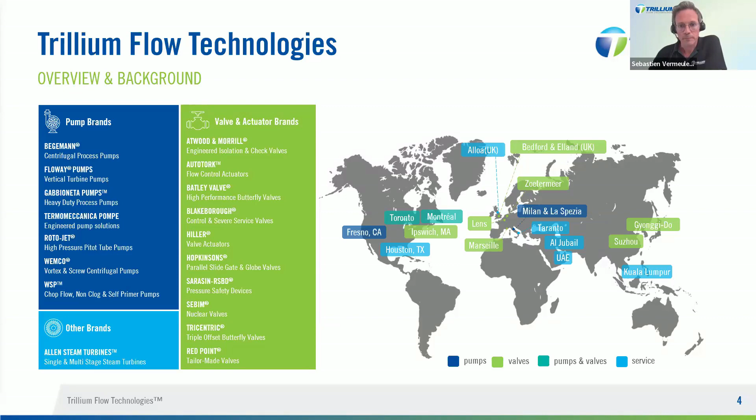So Trillium Flow Technologies' heritage of innovation spans 190 years. The corporation is not standing still, adding new products and services to make our customers' processes more efficient and productive. A recent example includes the previously mentioned Red Point valve product offering, joining the Trillium family in 2020, expanding our product and service provision for valves. And in 2022, we were joined by Termomeccanica Pompe, enhancing our expertise and offering in pumps for power, water, plus oil and gas, as well as enhancing the Trillium Flow service portfolio.

Just to have a core focus on the PRV solution, and also to demonstrate we have addressed the hydrogen market for decades: Sarasin got its first PO from Air Liquide, which proposed a unique solution for air separation units, ASU, and steam methane reforming in 1984. So it's a long partnership, and we already supply solutions for cryogenic or high pressure valves.

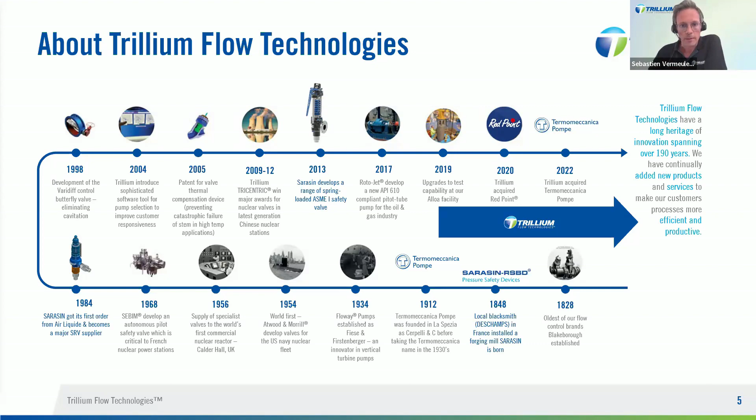So let's try to first understand the hydrogen challenge. I hand over to Simon for that. Yeah, so thanks, Sebastien. All right, so let's just break down a little bit the background of hydrogen. I'm sure some of you already know this, but it's probably worth just getting a good grounding around it.

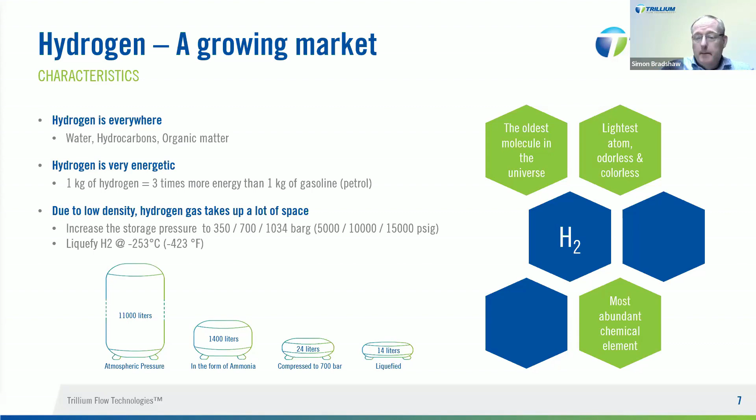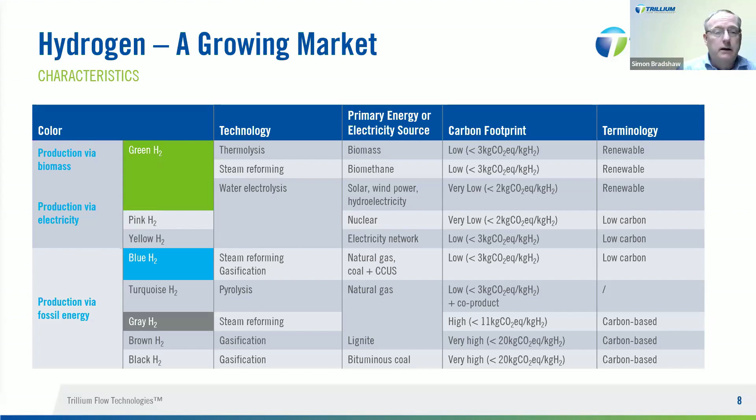Next slide. All right. The other thing you tend to see in the news is that hydrogen is going to be this massive Swiss Army knife that's going to do everything: transportation, this, that. The reality is that in the long run, and the long run market is not necessarily what we're in right now, certain applications are more likely to win out for hydrogen, and some are not, just because of the economics and the technical details. So there's a couple of ways to look at this.

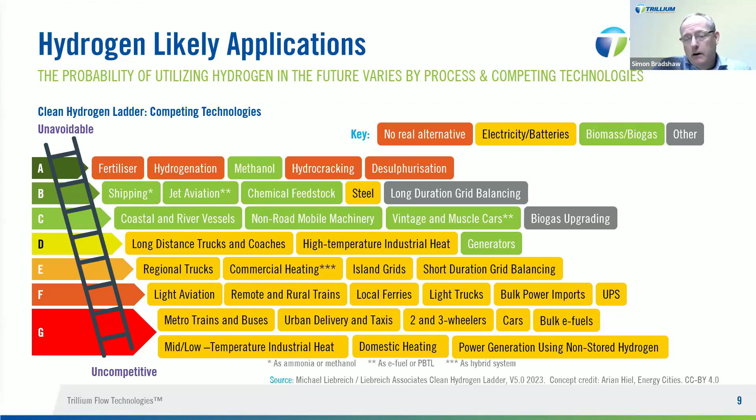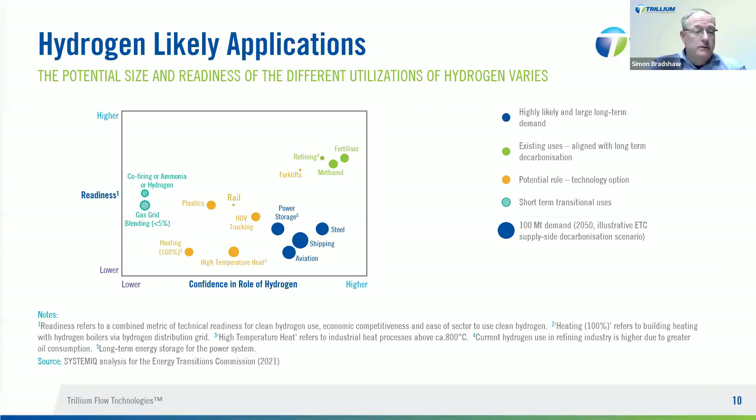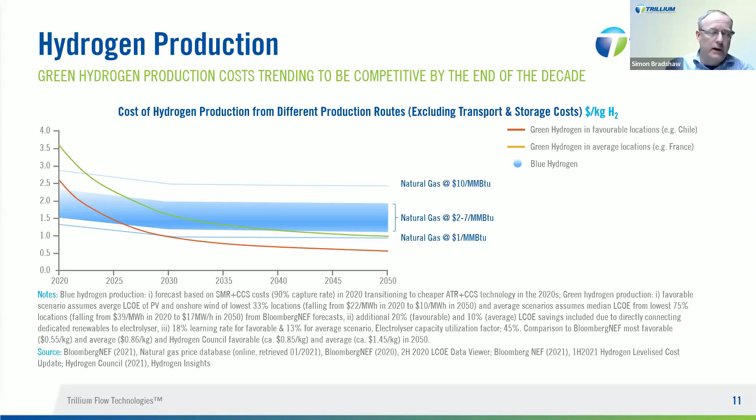And the takeaway here is when you put that up against the cost of creating blue hydrogen, which, if you remember, is using natural gas for steam reformation plus some form of carbon capture. If you look at the trajectory around the end of this decade, even in an average country, it looks like it will probably be favorable. In other words, it'll be more or less cost neutral as to whether you do blue hydrogen or green hydrogen. And so that's the kind of end point that we in Trillium are looking at, where green hydrogen really takes off. Okay. With that, I think I'm handing back to Sebastien.

So there are different kinds of hydrogen application, as we understand now, from production to end use, from upstream to downstream, and obviously we will find different kinds of application to serve this market. We won't cover all of them. Today we consider 39% is in the industry sector, 30% in transport, 26% in heating and power for buildings, 5% in power generation. So again, the idea is to show in this graphic the connection between the different applications and the product portfolio we can offer.

If you look at the upstream, so typically, as mentioned by Simon, if we consider gray hydrogen, steam methane reforming, where we will deal with syngas or synthetic gas, where we will split hydrogen and carbon monoxide. It's a mix, so the gas is not purified yet, and you can find a mix of different kinds of solution, from spring-loaded to pilot-operated solutions, either semi-nozzle or full nozzle type. Full nozzle being preferred to reduce the leakage rate.

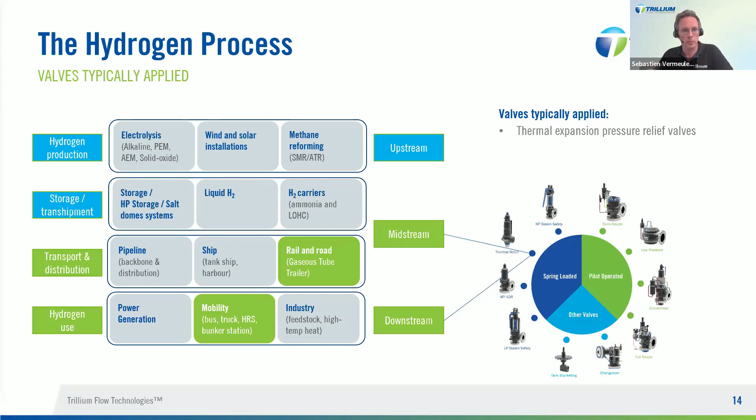So let's try to go more in depth to understand what safety and reliability mean and the concerns that are all around hydrogen. So as mentioned by Simon earlier, hydrogen is odorless, colorless, but on top of that is very flammable. And the biggest concern is also, even if we talk about blue hydrogen or green hydrogen, green means potentially it doesn't have direct impact on greenhouse gas emission, which is partially true, but also partially wrong. If hydrogen will help to reduce carbon dioxide emission, it will also have an indirect negative impact on global warming, up to 5.8 times worse than CO2 emission.

So how is it possible? The answer is not so easy to understand, but we will explain it. Once it is released directly into the atmosphere, hydrogen itself can interact with other gases and vapor in the air to produce a powerful warming effect. As an example, hydrogen can extend the lifetime of atmospheric methane, which is connected to the LNG market indirectly, and which is also an incredibly potent greenhouse gas, causing some 80 times more warming effect than an equivalent weight of CO2 over the first 20 years.

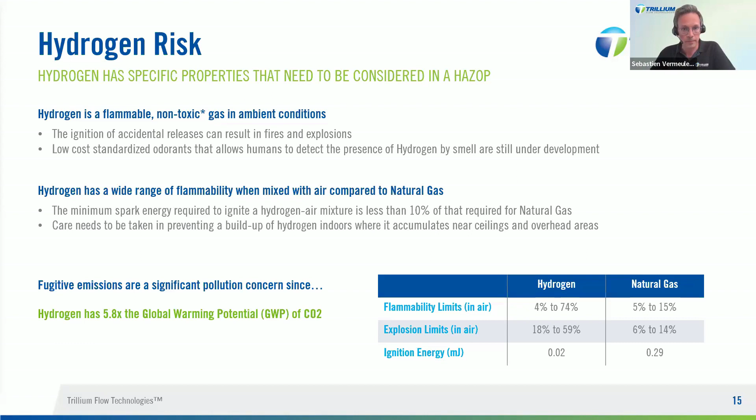How? Dealing with a solution to reduce leakage and to develop a robust design. One of the key things is of course to deal with the high pressure. We already see it, up to 1,000 bar. Propose the right material, we will see this, but on top of that, reduce the leakage.

There is a study that has been performed by the National Renewable Energy Laboratory, the NREL, about PRV reliability. The result is 45% of safety valves were within the spec. By spec, it means comply with what you can expect when you buy a PRV: to open at the right set pressure, to keep the right tightness, to release the capacity. That means 55% of PRVs fail.

If we go more in depth on this failure, the majority, 34%, fail due to the wrong set pressure tolerance. 5% fail to open or keep open. 16% have a leak rate issue above the spec.

So it is really important, even if we recognize safety valves don't have an impact on the operation when it runs properly: as soon as one fails, the complete process has to be put on hold. The process cannot run because it is part of the regulation to be protected by a PRV. If the PRV is not activated or is not installed properly, you have to stop. This is part of the regulation.

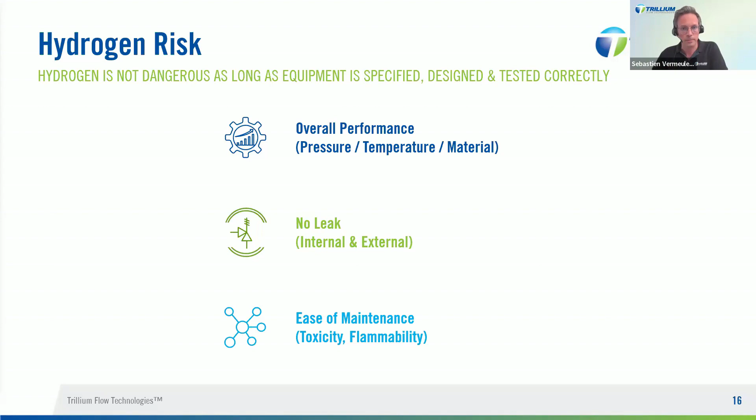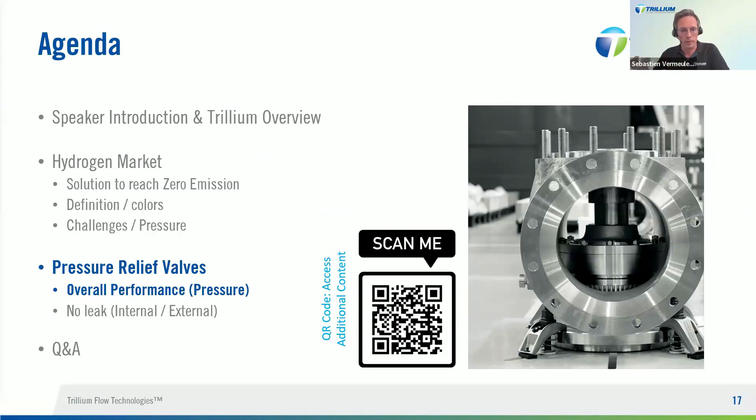So we get to the third part. Let us now present the product and the tests we put all around this new design. As said earlier, this solution is especially developed for hydrogen refueling stations. So it's only part of one single business.

The first thing is, what about the service conditions for hydrogen refueling stations? What kind of pressure can we expect? We can see we have two kinds of pressure, 550 bar and up to 1034 bar. The pressure is staggered. The main reason is H2 shall pass through a compressor, then be stored in a compressed hydrogen storage tank before being supplied through a dispenser. It's part of the process. As of today, due to the low molecular weight and high diffusibility, we adopt a spring-loaded valve due to its robust design.

What about the application code? Behind that, we still comply with ASME requirements. So it means the set pressure tolerance will be plus or minus 3%. The blowdown will be at 7% as it is an adjustable blowdown. The overpressure can be either 10 or 16% if it is a multiple valve scenario, which is obviously the case.

Regulations all around hydrogen are quite new. Each country has its own regulation. If you go to China, they have a regulation, in Europe as well. We consider today a regulation that has been developed by the Installation Classified for Environmental Protection, the ICPE.

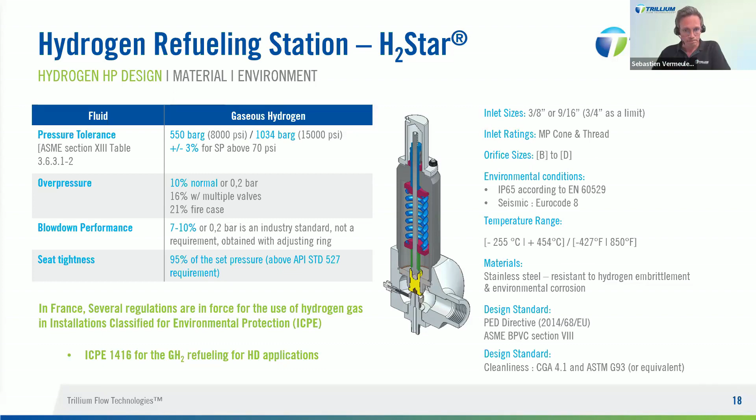So in terms of solution, the issue with such a product is the cycling effect. When you reach high pressure and the valve is discharging, you have some pressure gradient. So we perform some cycling tests. It is also true for dispensers. We have different kinds of dispensers we have to consider. Type 4 is for the 700 bar. It's a composite liner. And the specificity of this design is we minimize the dead space to avoid hydrogen gas pockets, and also to reduce the static fatigue.

We take the opportunity to do a brief parenthesis to talk about liquid hydrogen, even if today it's not considered for hydrogen refueling stations. It could be a solution in the future. As we said earlier, you have a choice between high pressure or liquefied, the idea being to reduce the volume of hydrogen through the dispenser to supply hydrogen to hydrogen cars. Again, liquid hydrogen is not very new. We provided for air separation units in 2012, 2013, and we continue.

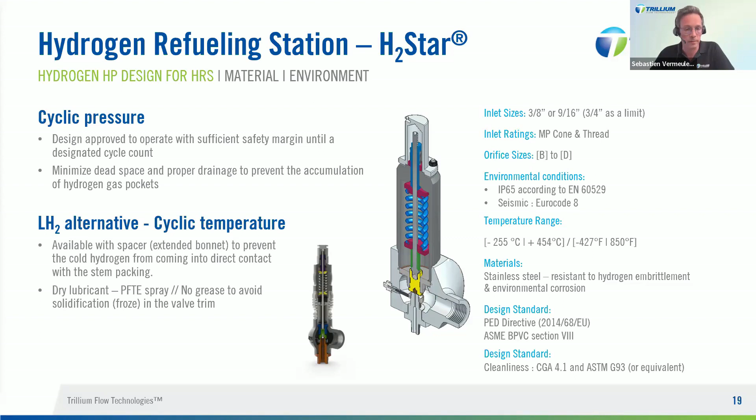But we need to make some adjustments to adopt a specific design, adopting spacers. Using spacers, the idea is to protect the spring. The spring has its own material. If you cool down the spring, you increase the stiffness and you modify the set point. That's the reason the spring should be protected and spacers should be adapted. Also, we need to adopt a dry lubricant to avoid solidification in the valve trim. So it's part of the considerations we adopt when we have to deal with liquid hydrogen or any other specific pure media.

Very briefly, before handing over to Simon, we will just go more in depth on this specific topic. If we talk about PRV, we have to consider different kinds of material category. Some of them have to be considered pressure containing parts. This is the envelope, what avoids hydrogen escaping directly to atmosphere. So we talk about the body, the bonnet, and the cap.

We also talk about the wetted parts, the parts that are continuously exposed to hydrogen. A valve is a normally closed device. It means it's not supposed to discharge continuously, and we have a limited number of components that are wetted parts. This is true for the nozzle at inlet and the disc. These two parts are especially exposed to hydrogen attack, and we can very quickly have a material property degradation of

the nozzle. The same laboratories, NREL, performed a study during a 10-year cycle count on such kind of material, and at the end, a nozzle had been damaged. So that's the reason we have to pay attention to material selection. Mainly 316L is preferred. We cannot adopt high-grade tensile material, harder material, due to embrittlement issues. But I will let Simon develop this.

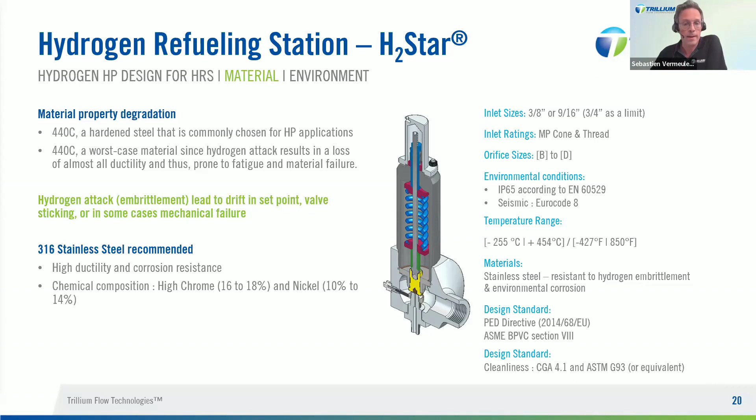But just before, I will also introduce some other products we as Trillium group can propose as a hydrogen solution to deal with hydrogen. You might be on mute, Simon.

Yeah, sorry guys. Okay, so although this webinar is primarily focused on hydrogen and safety valves, this is just to make the point that Trillium has historically provided many other types of valves into hydrogen service. This is, as Sebastian said, not a new thing for us. And I thought we'd throw a couple of those up there and then just talk about some of the specific challenges with handling hydrogen as a gas or a liquid.

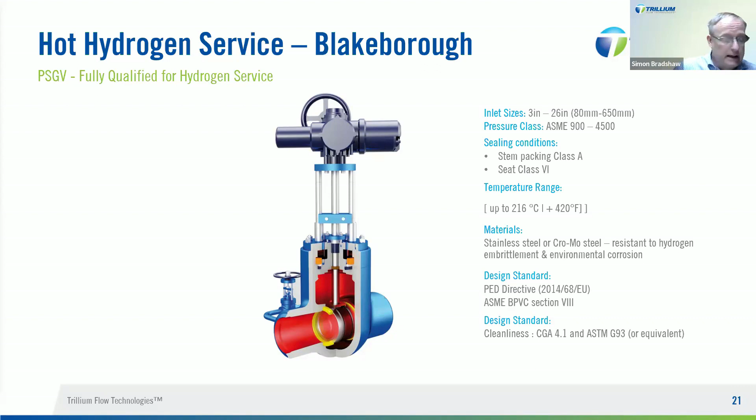So this one here was a Blakeborough parallel slide gate valve for hot hydrogen service, up to say around 400 Fahrenheit, 200 degrees Celsius. We can supply these valves in a number of configurations and a number of different sizes. The key thing to note is the sealing conditions, which Sebastian talked about earlier, because we don't want the hydrogen leaking out. That's a bad thing. I'm going to go to the next slide.

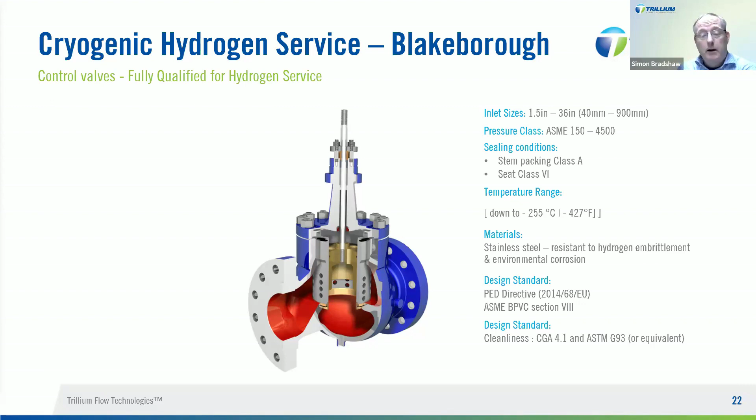And this one's for cryogenic service. These are generic cross sections, by the way, not specific, but they give you an idea. So again, fully qualified for hydrogen service, which is actually quite hard to do. There are some very specific things that are required in terms of validation of the materials to avoid degradation, cracking, that kind of thing. Again, very stringent sealing conditions required.

And then if we want to talk about what do we actually need to do for design for hydrogen? Well, it's a pretty small molecule. That's the first issue. So it likes to diffuse through stuff. That's its modus operandi. Hydrogen embrittlement is a thing. It primarily affects high strength steels. Actually, pipeline steels are one of the big concerns there. But there is the potential to negatively affect other materials depending on the variables that you see there, temperature, pressure, etc.

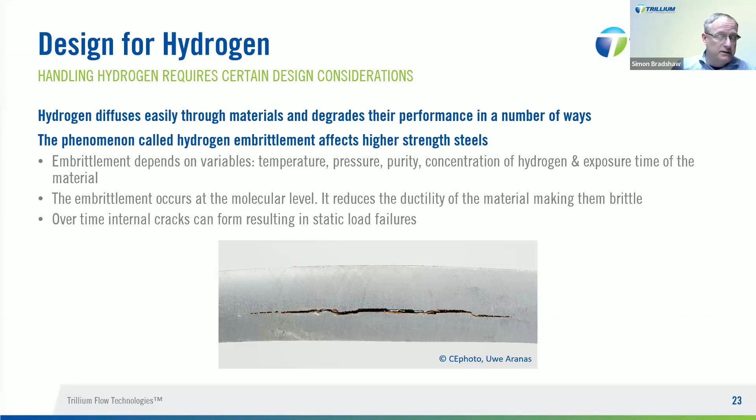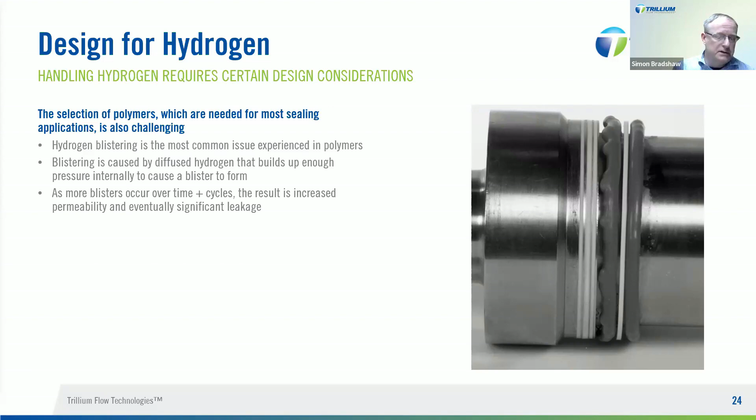Now, obviously, once it fails to do its job in sealing, you now have potentially much higher levels of emissions, which is something that we don't want. There are polymers that are better suited to hydrogen. PTFE is less sensitive to friction and to swelling in hydrogen compared to EPDM or nitrile. There are caveats to using that, however, and the design needs to be adapted appropriately for it to work and achieve, again, the tightness that we're looking for. And with that, I'll hand you back to Sebastian.

One more thing we can add regarding this specific H2 star solution is the connection. We also have to pay attention to connections because they can be a source of leakage as well.

So we adopt cone and thread solution first because it offers premium performance to handle high pressure. Even if, as we can see, there are some alternatives that offer better performance in terms of tightness and seismic, first we have to pay attention to this specific high pressure. So as I explained, we have to look at a compromise here, and the best compromise was to select a cone and thread solution.

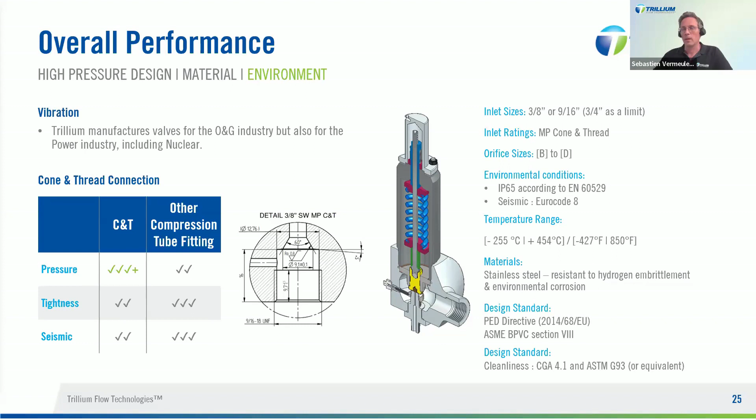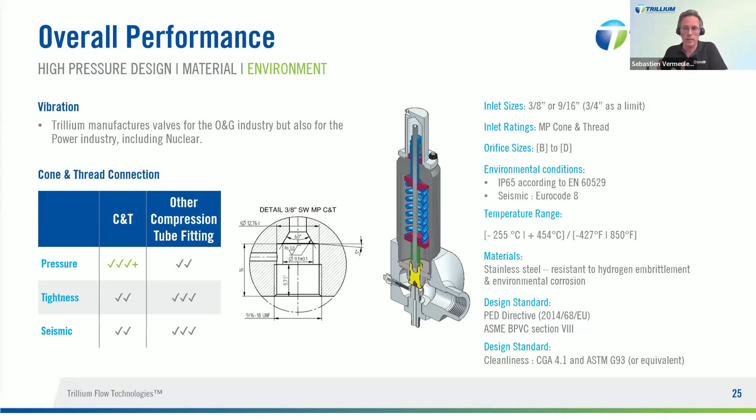So it's good to have a dedicated product for that, but it's also better to test it properly, as we discussed earlier. Some valves might fail due to a wrong setting or a leakage issue. So it's part of our daily job to deal with that and to test the valve properly. As main manufacturer, we have to meet some requirements, and we will take the opportunity to explain a part of our process in general, and more specifically to deal with hydrogen services.

So there are different steps. Here we have to separate safety function and performance. In terms of safety function, regardless of the product category, either spring or pilot, a pressure valve is first a self-actuated product that has to meet only two safety criteria: to be open at set pressure and to relieve the capacity. Open at set pressure means not only one time, but it has to be demonstrated at least 3 times. So that's the reason why we measure the valve set pressure.

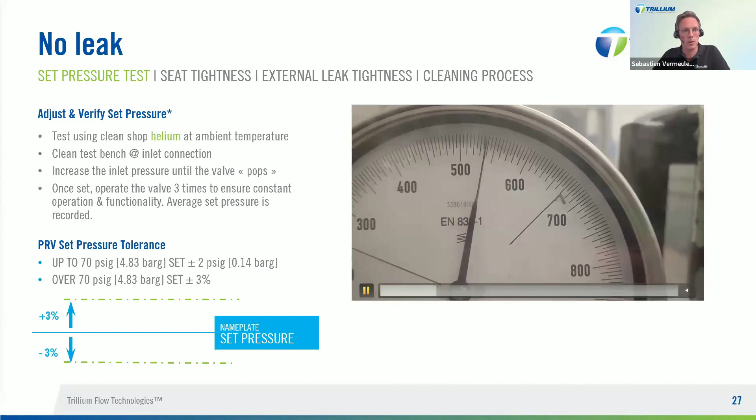We make the valve pop 3 times. We make the pressure increase slightly. We need to respect a certain pressure gradient, and we make the valve open 3 times. Each time we check the value, and the value is when you have this pressure drop from 550 to 500. And we check the 3 values that have been measured are within the set pressure tolerance defined by ASME Section XIII. It is between plus and minus 3%. If you succeed, you can go to the next step.

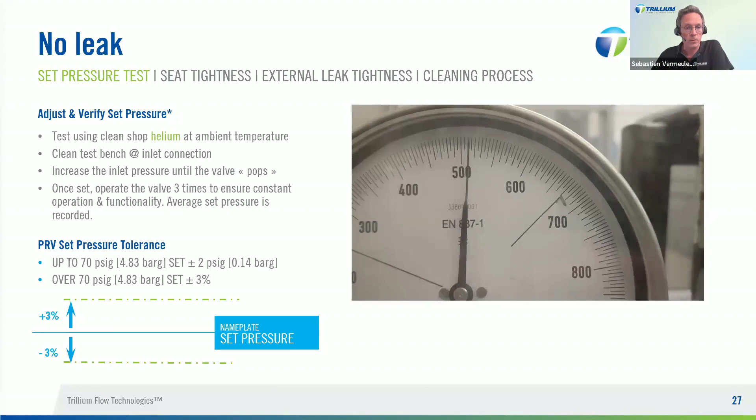For hydrogen, we not only perform the test on air, but we can also perform the test in helium. First, because helium is a thin molecule as well, which is quite close to hydrogen, so we reproduce the actual scenario. We also use helium to perform leak tightness. Helium can be used at ambient temperature, but we can also use it to simulate cryogenic conditions. So in Saint-Razin, we are also equipped with a cryogenic test bench.

It's a boil-off, so it means the process itself is cooled down to reproduce the actual process condition. The difference is we use nitrogen here, so the temperature is not so low. For hydrogen, the boiling point is minus 253. We reach minus 196 degrees Celsius. It's part of the challenge to be able to test the valve at values lower than that, using helium, for example, whose boiling point is minus 269 degrees Celsius. But we have to use a specific laboratory in that case.

For the moment, in-house, what we can do is use liquid nitrogen to push on the helium gas, which is localized on the top side of the vessel, to make the valve open in helium and to also perform helium testing for leakage. So leak tight test. Leak tightness is the second part of the process, if you succeed the set pressure test.

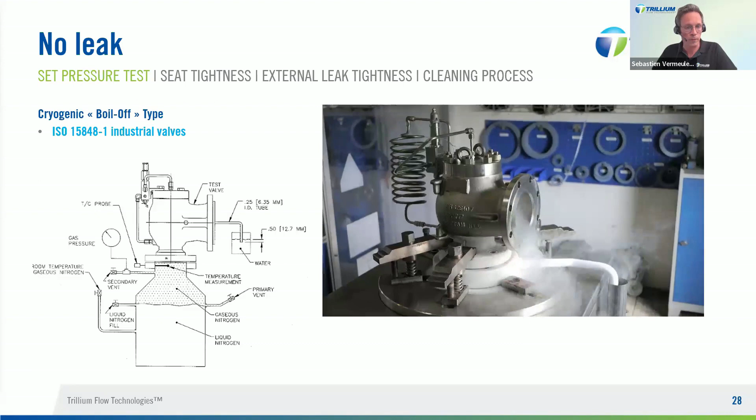In this video, as you can see, we also have some pilot operated valves, not only thermal expansion, that have been qualified for cryogenic application as well, which is largely used for the FLNG industry, but it's a separate topic.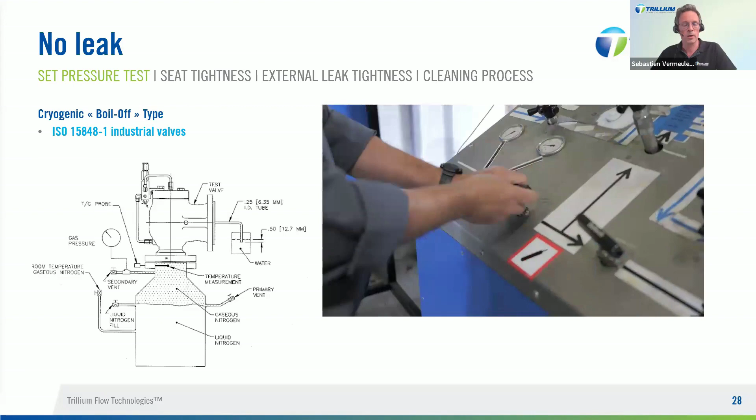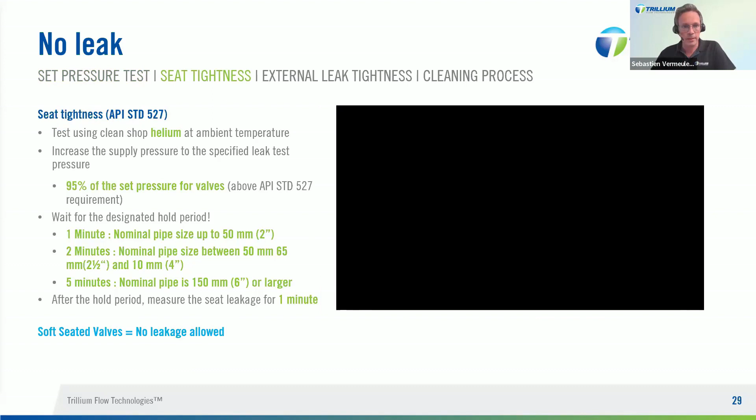So the next step is to measure the seat tightness. For seat tightness, in that case, we follow API Standard 527. It's a guideline. By guideline, it means we can supersede API Standard 527. It explains how to perform the test. So for example, in that case, we talk about a valve with a set point of 550. As a minimum we have to perform the test at 90% of the set pressure, as part of this guideline.

But in that case, we raise the bar, we test the valve up to 95%, even up to 535 bar, as you can see in this video. The valve is tight at 535, so it's higher than 95%. 95% is what we warranty now. So we make the pressure increase from 0 to 535 and stabilize the pressure.

We stabilize the pressure, put a blind flange at the outlet, and make sure we have zero bubbles. This is part of the API requirement when we use a soft seat. Zero bubbles is acceptable for a minimum duration. In that case, it's 1 minute.

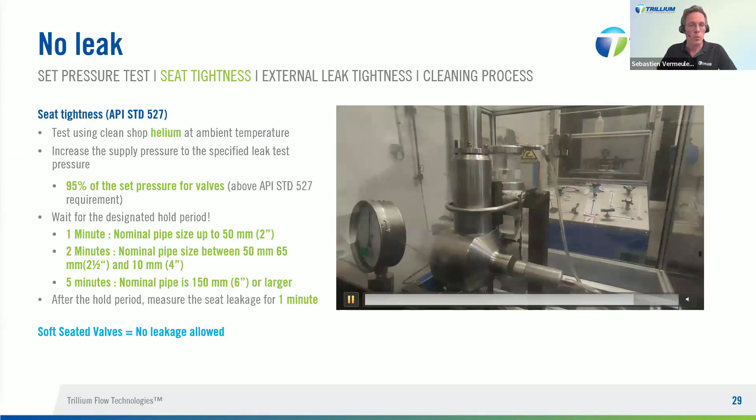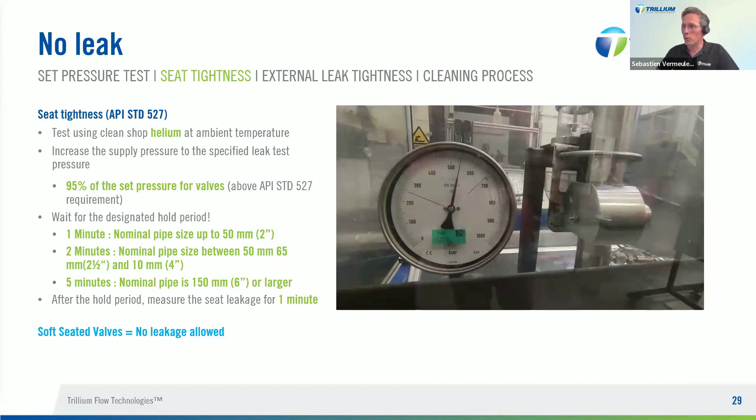And again, this is part of the process to comply with API requirement for seat tightness at inlet. We also perform something similar at outlet, measuring the potential leak rate through the pressure containing part. By pressure containing part, it means including the body bonnet bolting connection, the body nozzle connection, body adjusting screw connection. Also, we check the body cap connection on top side and the valve inlet outlet as well.

For that, we use a specific device, a sniffer, because the particles are so thin, we have to use it. So Trillium criteria are even more stringent than basic customer requirement, which is about 10-4 Pascal cubic meter per second. That represents 1 bubble per minute, if we have to compare.

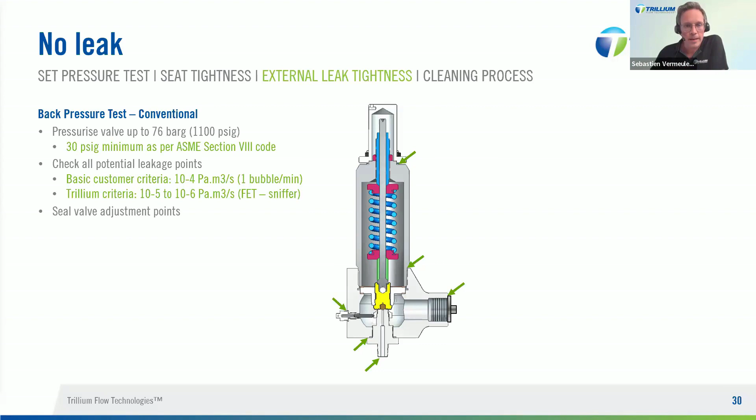Again, the last part, but not the least important, is we are dealing with pure gas, pure process. It's something Trillium used to deal with, not only for hydrogen, but also for oxygen service applications that are more or less the same. When we have to deal with new markets, we won't reinvent the wheel. It's not only true for Trillium, but it is regarding the applicable standard.

One of them, which is recognized, is the CGA G-4.1. It is an internationally harmonized publication, and it is referenced by the National Fire Protection Association, the NFPA. This describes the cleaning method and requirement for equipment used in the production, storage, distribution, and use of liquid and gaseous oxygen to reduce the risk of fire, explosion, or promotion of combustion. So it is something which is clearly recognized. And we follow this method to deal with hydrogen.

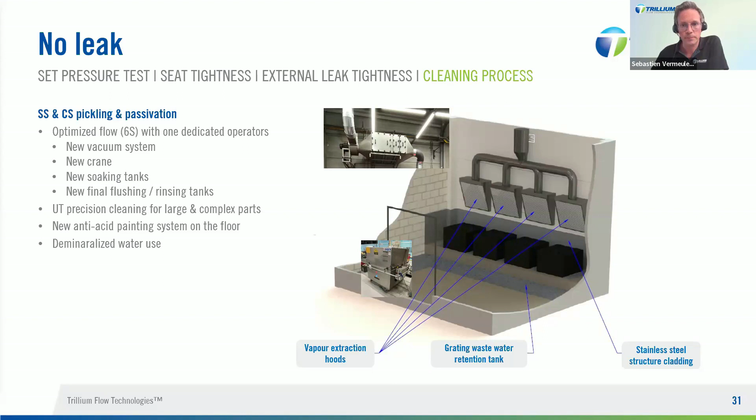Part of the process is to have a new area to handle acid cleaning and to separate as well carbon steel and stainless steel material to avoid impurity. Even if we said for hydrogen we only deal with stainless steel valves, it can happen. We have to handle different kinds of purchase order, different kinds of application. And in that case, we don't mix both. That's the most important. So we have cleaning at any stage. Acid cleaning is part of them.

We also have a completely new white room where we pay attention to all the devices that are installed. It means the test benches are degreased, all the machines and tools that are used are completely degreased, and this cleaning room has restricted access. Employees who get in there have specific equipment, specific clothes. So parts are clean before assembly. Then we also use specific lubricant during assembly.

And after assembly, after testing, we can also consider double seal welded pockets with intermediate desiccant if required to make sure the valve keeps a perfect tightness from shipment to the customer site. So it's a method we put in place with a dedicated employee that has been trained to follow this process. And to support that, we also use a specific non-destructive examination. So white wipe is the first level, but we also use a white and black light inspection in this dedicated area using a Wood lamp.

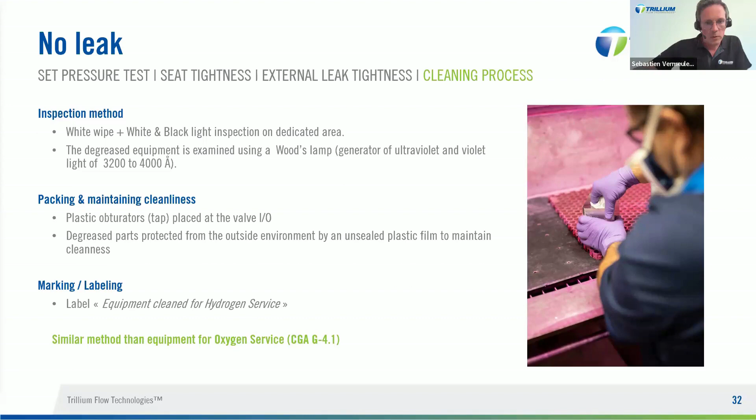We now arrive at the Q&A session. So just before, as a summary, we want to remind you briefly of some headlines regarding the customer concern. Here, the main challenge is we have to deal for the moment with gas hydrogen at quite high pressure, where we have to use a specific connection, a specific process to clean the valves to avoid ignition or to reduce the flammable risk. Because it's pure hydrogen, we also have to reduce any risk of leakage, to reduce greenhouse gas emission indirectly, even if it is green hydrogen.

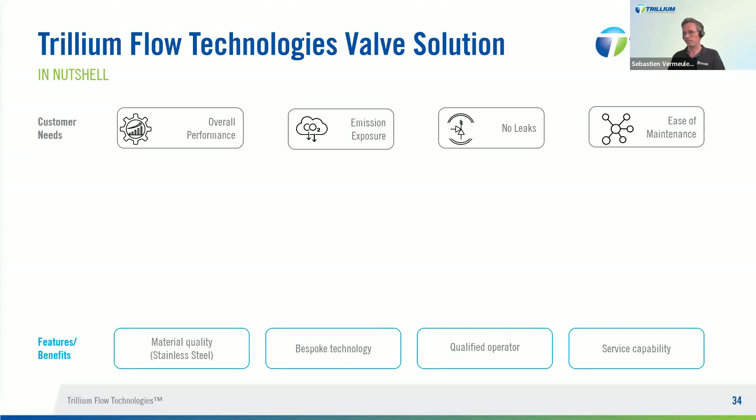And because we talk about hydrogen refueling stations, so it's automotive industry, we need to make it run 24/7. So maintenance is very important, to have a solution to quickly replace or offer a product which is premium at a reasonable price. To meet this customer requirement, we develop specific features: a block, a small thermal expansion valve, a robust design with a reduced dead space, full stainless steel 316L design, that will be tested and adjusted by a qualified operator.

What's the consequence? What's the total potential value of this combination between customer needs and features we put in place? First, we meet the market demands and the associated local regulation, whether in France or overseas. Depending on the territory and the policy that has been put in place, the fine, as you can see, can be potentially crazy expensive. The gap is significant, but it also depends on the tolerance the local regulation puts in place.

And as I said earlier, keep in mind, even if in the PRV industry it's true it doesn't have any impact on your process, this is partially wrong, because we guarantee a very high tightness, and the pressure is the money maker. The higher the pressure, the better performance you can expect.

And to reach 95% of tightness, 95% of the set pressure has a tightness, as an operating pressure as well, that will have a positive impact on the total process. When it is done, and it is a challenge for a spring-loaded valve, as long as the PRV works, it doesn't have any impact on your process. The drawback is if the PRV stays in open position or starts to leak, then you have to stop the complete process.

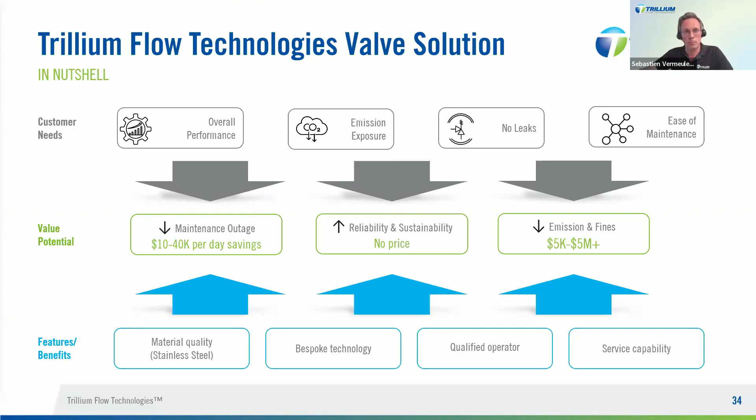So that's part of the issue, and that could have a significant drawback in case you have a maintenance outage from 10,000 to 40K per day. So having this robust design will help you to solve that. And again, we won't repeat, but spring-loaded is a robust design that offers reliability. So we arrive at the end of this session.

Yeah, and I think it's worth noting these are valves for safety critical applications typically, and as Sebastien laid out, there are a number of very specific processes that are used in the testing, cleaning, and packaging of the valves. Sending out a bunch of spare parts, we essentially have no assurance of how those are going to be put together. So that's something to think about. This is stuff you should be controlling if you want to be successful.